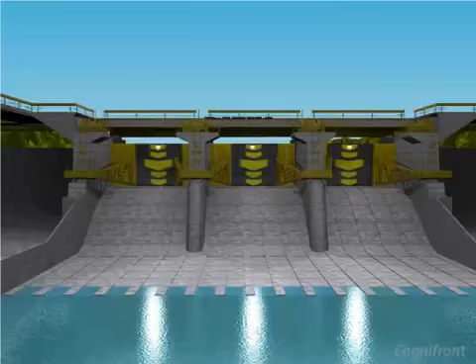Hydroelectric power plant.

In this session, we will study about hydro energy, review the history of hydroelectric power plant, study the working principle of hydroelectric power plant, and specify the advantages and disadvantages of hydroelectric power plant.

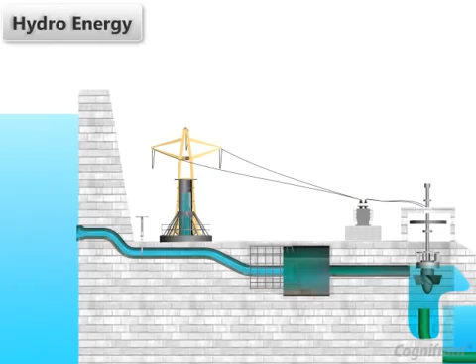Hydro energy is the energy generated by the force of water. This is a powerful way of generating electricity. The hydro energy is converted into electric energy by hydroelectric power plant, and this energy is called hydroelectricity.

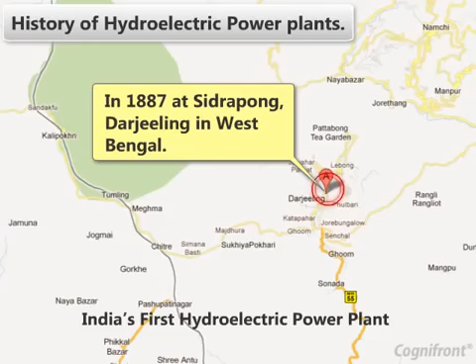History of hydroelectric power plants. World's first hydroelectric power plant was built across the Fox River in Appleton, Wisconsin in the US in the year 1882. India's first hydroelectric power plant was commissioned in 1887 at Sidrapong, Darjeeling in West Bengal.

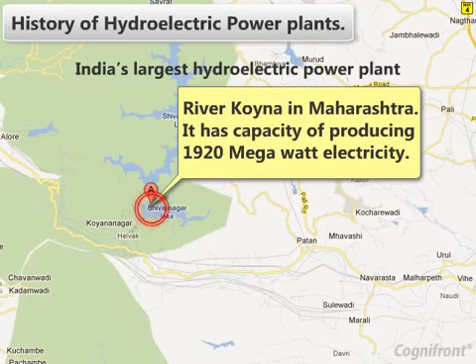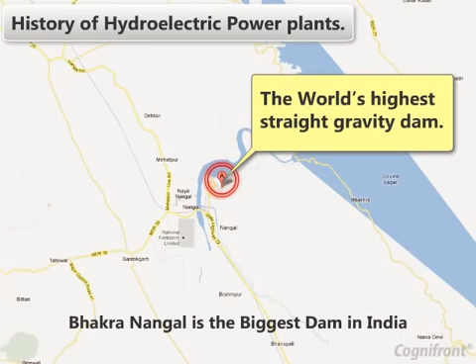India's largest hydroelectric power plant is located across the river Koyna in Maharashtra. It has a capacity of producing 1920 megawatt electricity. Bhakra Nangal is the biggest dam in India as well as the world's highest straight gravity dam.

The working principle of hydroelectric power plant. In this power plant, production of electricity depends upon the height of the water from ground level, volume of the water flowing per unit time, and efficiency of the turbines.

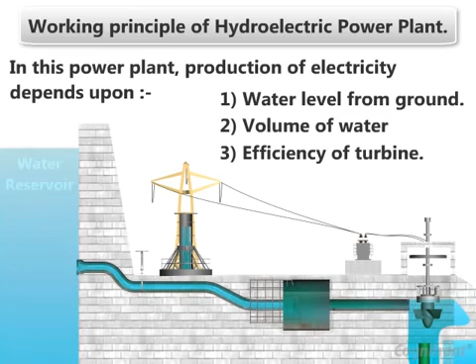Hydroelectric power plant requires a water reservoir, so these plants are constructed near big dams. Water stored in dams has potential energy. The water under pressure is carried by penstock and supplied to the turbine through the inlet valve.

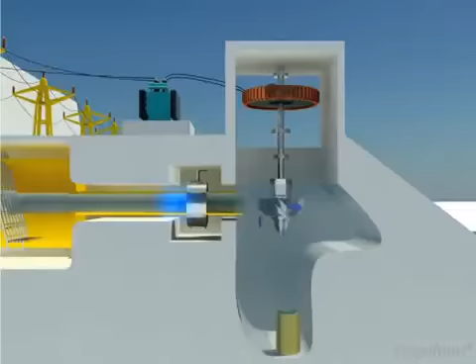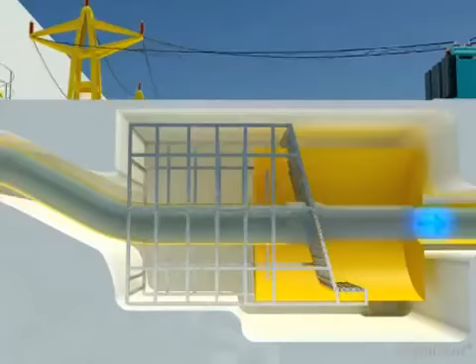Penstock is a pipe made up of steel or concrete. A surge tank reduces the excessive water force on the penstock. Here, trash rack prevents the debris from getting entry into the powerhouse.

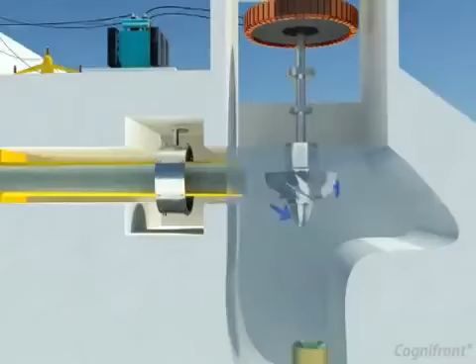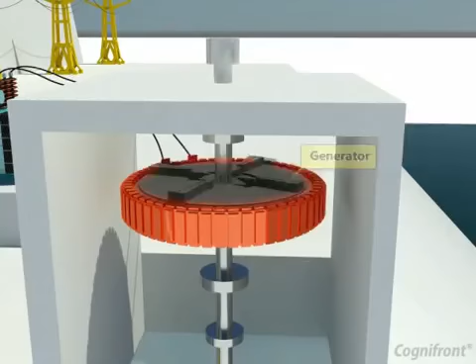Due to the force of water, the turbine starts rotating, due to which mechanical energy is produced. The shaft from the turbine is connected to the generator. Therefore, the generator produces the electricity. The voltage of this electricity is raised by using a transformer and is transferred by the transmission lines.

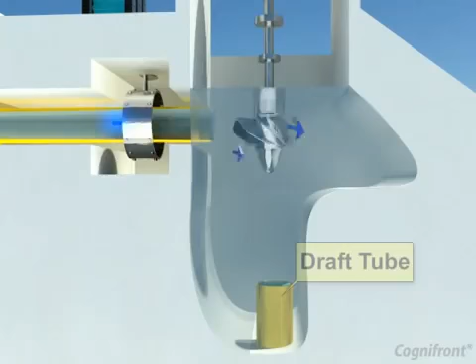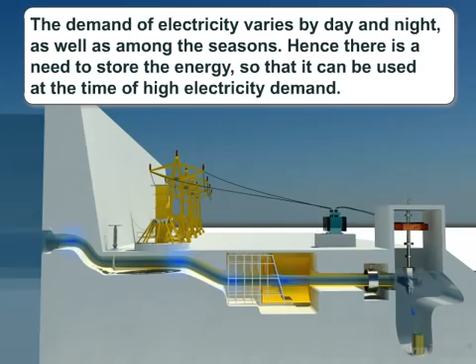After running the turbine, the water is passed to the downstream water level by draft tube. The demand of electricity varies by day and night as well as among the seasons. Hence, there is a need to store the energy so that it can be used at the time of high electricity demand. This can be done by using the pump storage process.

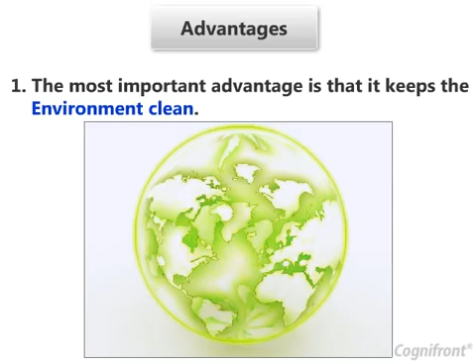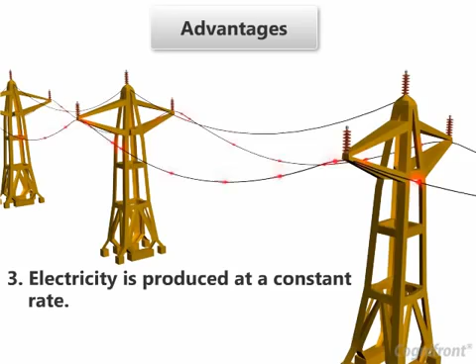Advantages and disadvantages of hydroelectric power plant. The most important advantage is that it keeps the environment clean. Hydro energy can be stored in high-level reservoirs and used whenever necessary. Electricity is produced at a constant rate.

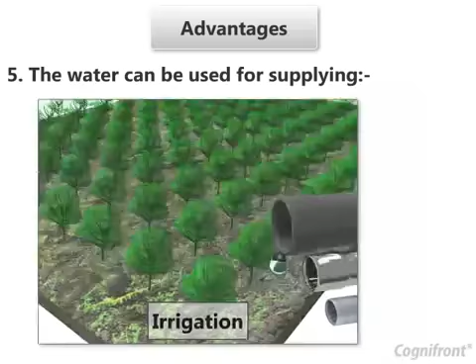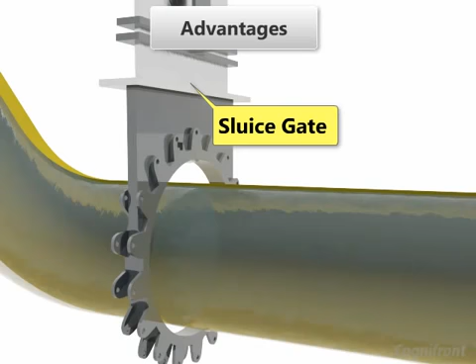The life of dams and power plants lasts for many decades. The water can be used for supplying drinking water, irrigation, water sports, industries, power plants, etc. Another advantage is that when electricity is not needed, the sluice gate is closed to stop the generation of electricity. It also allows storage of water to be used whenever necessary.

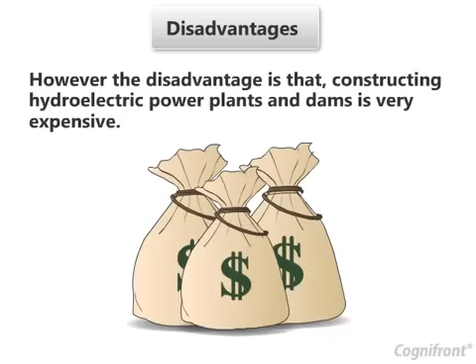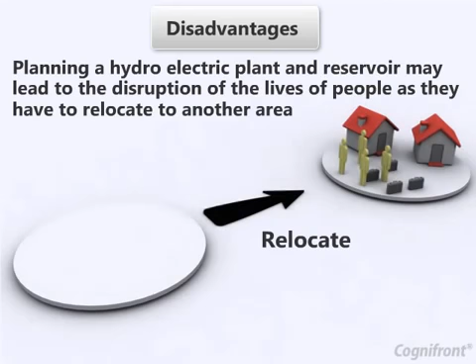However, the disadvantage is that constructing hydroelectric power plants and dams is very expensive. It requires large area. Another disadvantage is that planning a hydroelectric plant and reservoir may lead to the disruption of the lives of people living in that area, as they have to relocate to another area.

In this session, we learnt about hydro energy, the history of hydroelectric power plants, the working principle of hydroelectric power plants. We also studied its advantages and disadvantages.